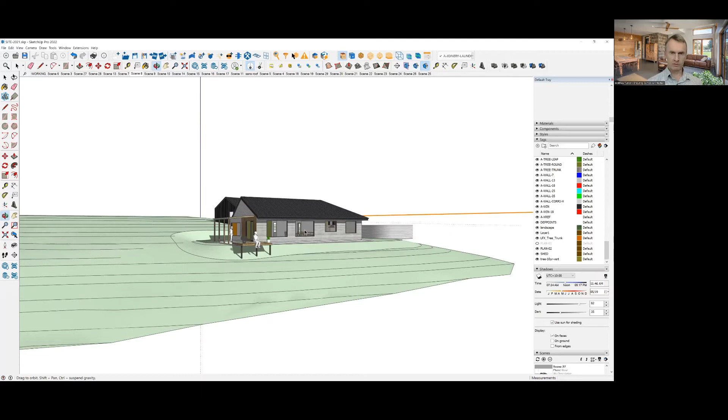So we have used a structural method called structural insulated panels, or SIPs. You can Google that if you don't know what that is already, or you can have a look at the Structural Panels Australia website. That's the manufacturer where we got our panels made. So they're located in Daylesford. Our home is based in Smeaton, about 20 minutes drive away. So very low transportation miles for

the wall structure of the house. So SIPs are a combination of structure, so they hold up the roof of your home. They provide insulation. They provide bracing, and in our case, they also serve as the internal wall lining. Another benefit of using this product is that there's a lot less timber. So we've all heard about the timber shortages, the increasing costs for timber and other materials. So this uses a lot less timber.

The other benefit of that is that there's a lot less thermal bridging through the wall. So instead of having a timber stud every 450 or 600 mils across the length of your walls, in this scenario, we only have studs on either side of the window and door openings, and so less thermal bridging where heat can transfer through something solid in your wall. We have mostly insulation, which comes in the form of rigid polystyrene.

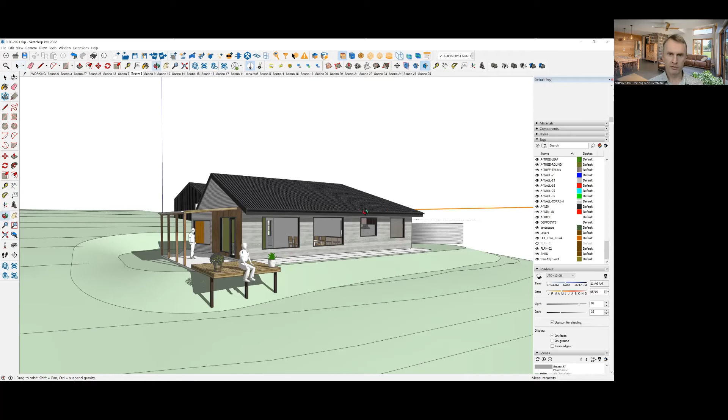So the area where we are, there's a lot of history. We're on a hillside. It's the site of the quarry where they mined the bluestone to Anderson's mill. So something very modern, flat roof, parapet walls is just not going to be appropriate here. So we've got a fairly steep pitched roof, which serves to shed a lot of rainwater, which falls very fast, which happens very often. Creswick just up the road flooded quite badly during the summer. But also you can mount your solar panels flat on the roof.

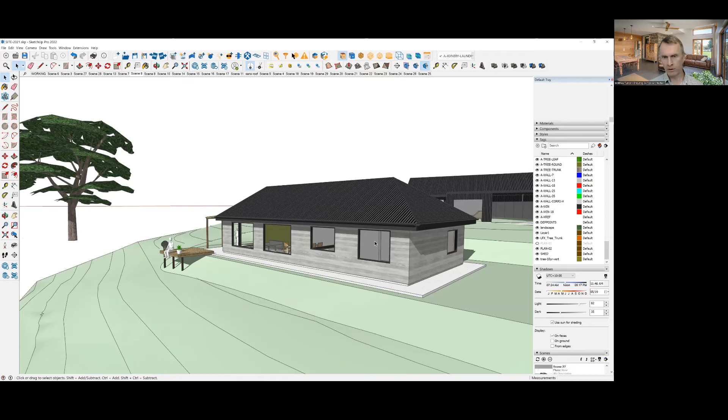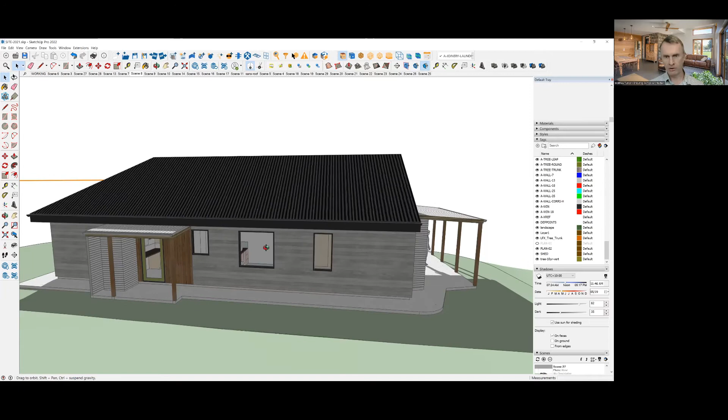So anywhere between about 20 and 30 degrees in our part of the world is ideal to mount your solar panels. So majority of the bigger windows on the north to let in that solar gain, one small window on the west. On the south, we've just got a glazed front door which lets light into there. We've got a toilet, bathroom, and second window for the bedroom. So really trying to put a majority of the glass on the north of the building where you're going to get the direct solar gain coming in.

There it is hitting the concrete slab floor. And this simple roof overhang is all that you need to block out that high angle summer sun in the summer, but when the sun is lower in the winter and most of the rest of the year it's coming down low and comes in quite deep into the building. And I can actually show you a couple of photos of how that's looking now.

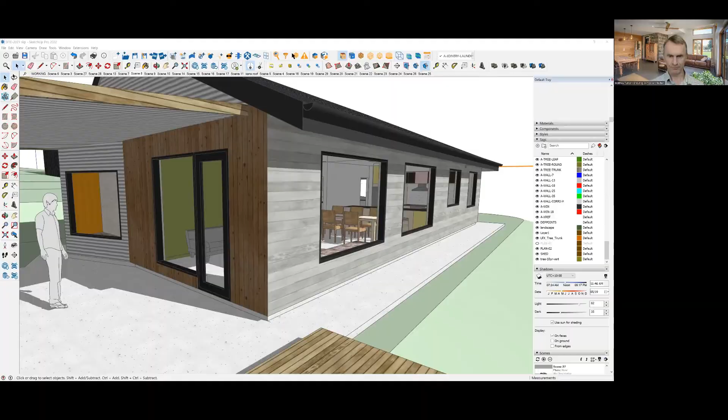Okay, I haven't done this in ages, so everything takes me a bit of time to figure out what I'm doing. So this is taken a little while ago. As I said, the building's pretty much finished now, but this is that northeast corner of the build. If I get my pen here, my red pen.

So this facade here is the east, which gets the morning sun. Obviously, you don't want too much of that hot morning sun in the summer, so we do have a deep veranda built over this side now, which does provide a lot of shade to that glass. But at about 10:30 in the morning in winter, the sun can come in underneath that veranda and be heating up this living room window here, starting to hit the building early in the morning.

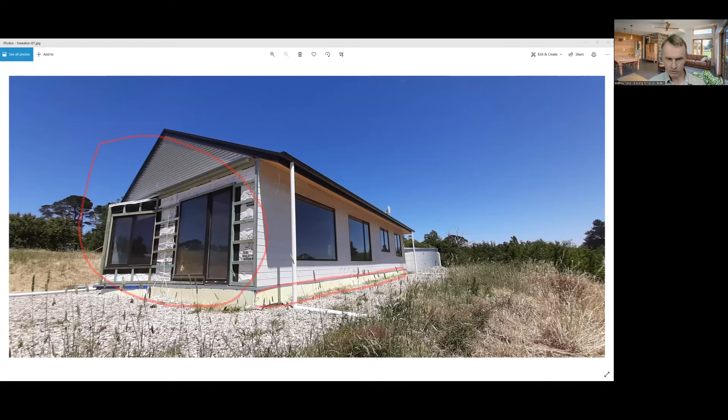You can see all along the edge of the building, that's our slab edge insulation. So the building has the floor level about 250 mils above ground level, which is actually in accordance with the Australian standard, but you don't often see many people do that. So what that allows you to do is to build up paving around your building and then have a step of about 150 mils up to your floor level. So I know some people don't like that. They like that smooth, stepless transition into their building.

But from practicality's sake, that's a detail you'll probably thank me for, when it's going to stop direct rainwater from coming in and lots of leaves and debris from easily getting in through your open doors. It just helps to keep your house cleaner and keep that water out.

So that slab edge insulation goes all the way down into the footing, quite deep into the ground. So it does actually protect the perimeter of the slab from greater fluctuations in temperature, which you tend to experience around that ground level, less so directly under the building where it's more protected.

Go into more detail with our home once we move in. We'll produce a couple more videos on YouTube.

Just try and get, I don't know what I'm doing here. I'm just gonna stop that share. Okay, what else have we been doing? Right.